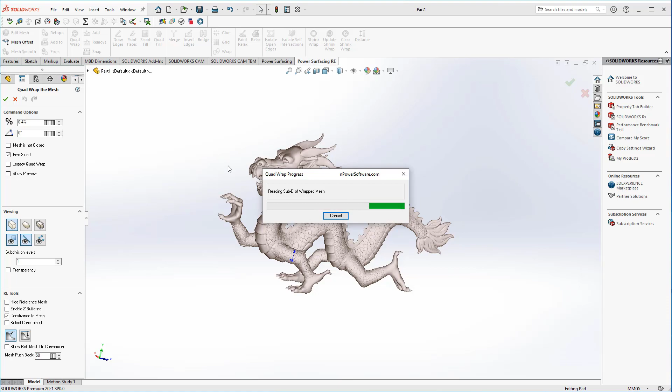Once the import is complete, we're left with this model. Now we use the quad wrap to wrap a layer of polygons around the model. I use 0.4% to capture a little bit more detail. Even at 0.4%, it still missed a lot of the finer curves and sharp edges that were on the reference mesh.

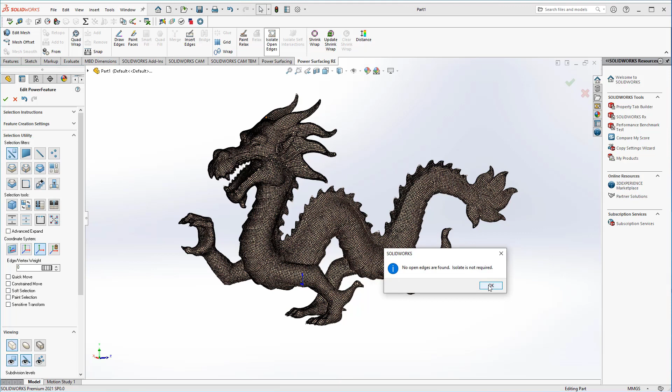We can use isolate open edges to check the quad wrap and see if any holes were left in the model. That is not the case here, so we can continue with our conversion. To pick up the smaller details, we could go with the finer quad wrap, but a far more efficient way of doing this is using shrink wrap.

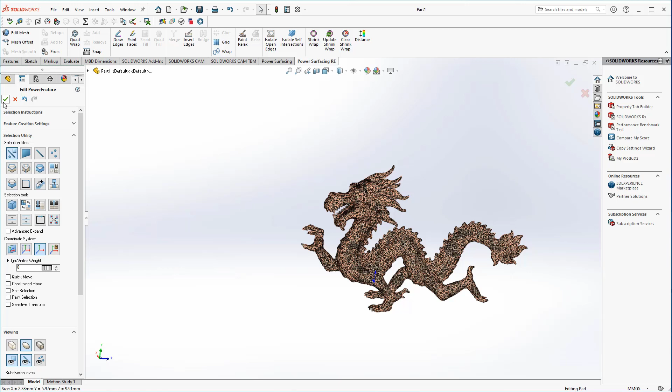The shrink wrap forces our layer of polygons to follow the curvature of the reference geometry. At level 3, we can now see a lot of those smaller details that we missed initially. We can now use isolate self-intersections to see if there's any self-intersecting geometry that's going to cause us issues with the conversion. There aren't any self-intersections, so we can go ahead and continue with the conversion.

Now we have a valid solid with all of the details from the original ZBrush mesh that we imported.

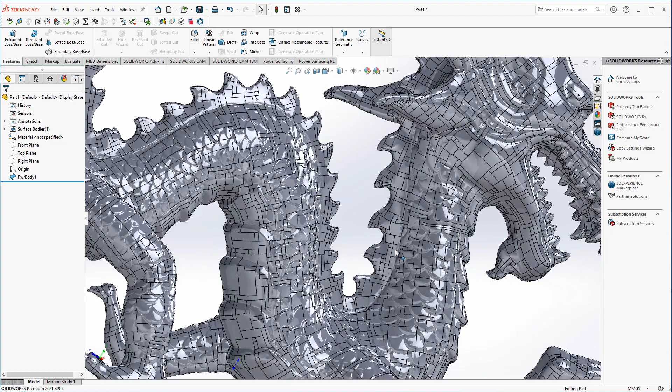In this video, we'll be taking a look at a few ways you can convert a ZBrush model into SolidWorks using Power Surfacing RE. There are 3 different ways to do this, and each will give you a different number of surfaces as a result. The first way is just the standard conversion of importing, quad wrapping, shrink wrapping, and then converting into SolidWorks. This is perhaps the simplest way, but also results in the largest number of surfaces as the output.

The other 2 methods both involve using the ZRemesher tool in ZBrush. Once we open ZBrush and have our model up, we start by duplicating it. We then go to the Geometry tab and select the ZRemesher tool. I use the default settings for ZRemesher, and it output these polygons. I now use the divide command.

For this next method, I went with the subdivision level of 4, which outputs a similar number of polygons to the original. This allows me to capture the most amount of detail when we go to the next step in SolidWorks. Now use the project tool to capture all the detail on the original model. I set the distance to 0.5 here. Now we can export the model and import it into SolidWorks.

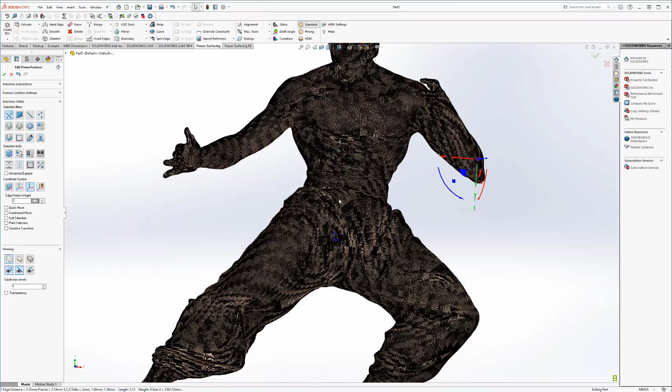We import the model as an OBJ sub D. This brings it straight into Power Surfacing. I select meters because the values are quite small. Here we see that there were a large number of polygons from the subdivisions in ZBrush. We can directly convert this into SolidWorks now. There are noticeably fewer surfaces here than there were with our traditional conversion.

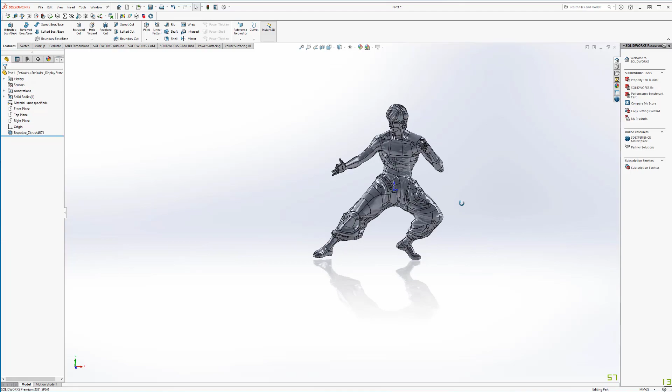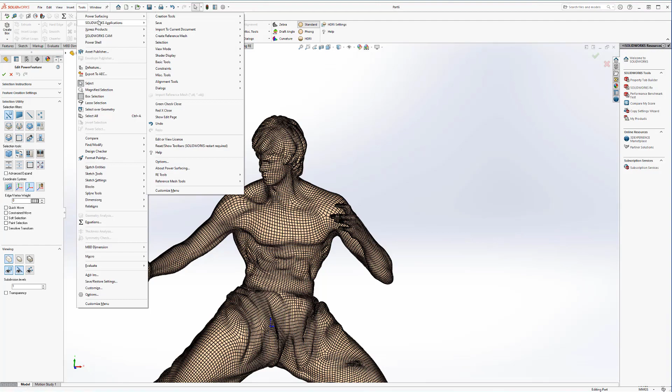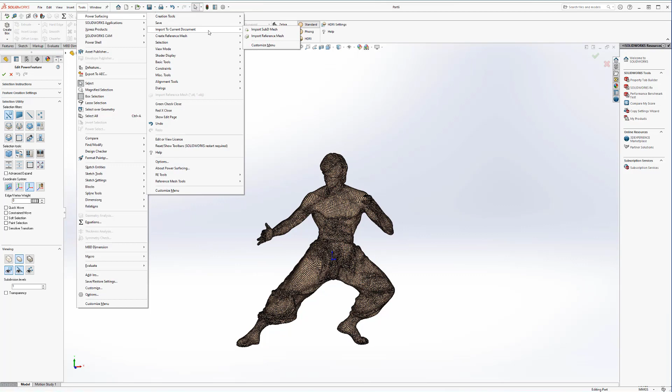For this last method, I went back into ZBrush and changed the subdivision levels down to 2. You again import a ZBrush file as an OBJ sub D. In the Power Surfacing options, I reduce the sub D pushback so that I don't see the back-facing edges. Now I open our original ZBrush file as a reference mesh.

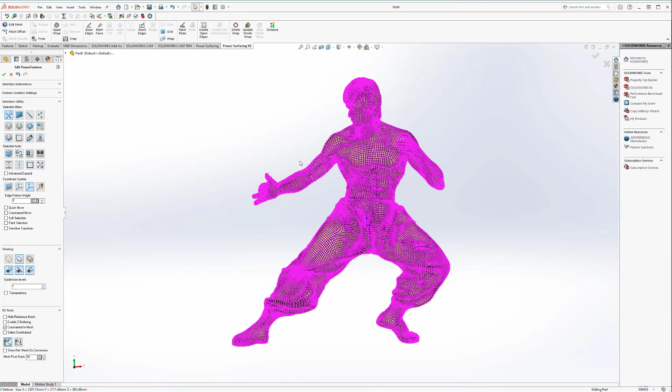I then select all the vertices and add references. Now I do the shrink wrap to shrink our SubD down to the reference mesh. We want to turn optimization off to prevent additional surfaces from being created. From here we can convert into SolidWorks.

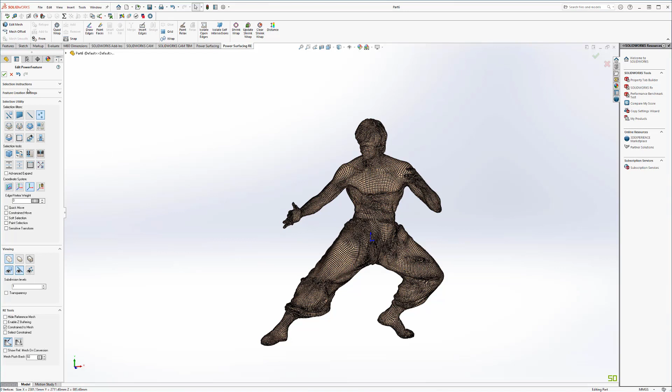The benefit of using these methods is that it still exports a high quality model, but also outputs a lower number of surfaces than a standard conversion. We see the model using the final method. Here's just using the remesher and the conversion. And here's the original method we tried.